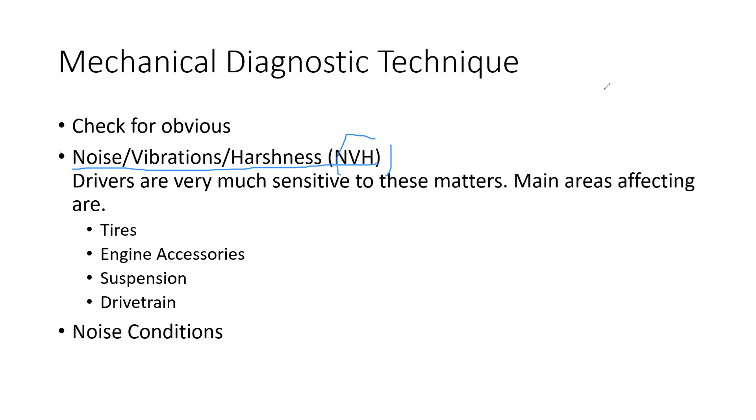So the difference you feel between a brand new vehicle and an old vehicle actually comes down to this NVH part. There's a specific module dedicated to this in your syllabus, which I think you'll learn in the seventh semester. Since this is the most important part we can feel - we can't feel anything happening inside unless it's transferred to the driver as noise, vibration, or harshness. Harshness being a very rigid suspension, or knocking, that sort of thing is what we actually feel.

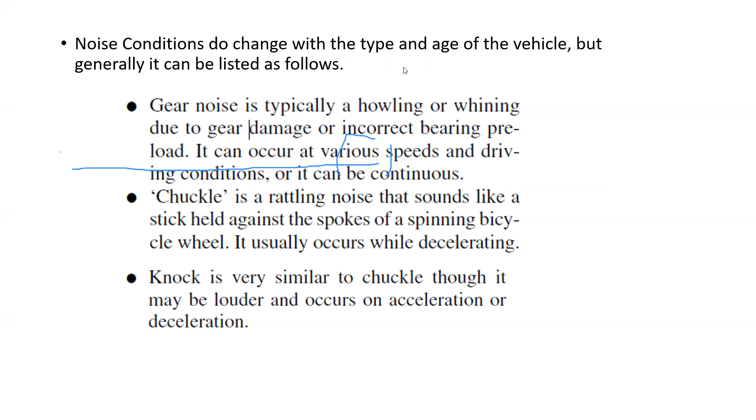So when it comes to noises - in this mechanical diagnostic section, we will be discussing these three: noise, vibration, and harshness. Noise is one of the main things. Noise conditions do change with the type and age of the vehicle, but generally it can be listed as below. That's an important thing, let me explain why.

If you look at a vehicle made in the 1980s versus a vehicle made in the 2000s - let's say a car, let's take a Toyota Corolla, a very common example. If you take a Toyota Corolla made in 2005 and compare it to the same vehicle made in 1985...

That's a 20 years gap. So between these 20 years, the vehicle's engine noise changes, right? Body shape changes. So because of these changes, the noise will actually be changed.

One of the main important things is, if you look at an old vehicle, something like the 1985 Toyota Corolla, it has rubber seals going all around the wheels, all around the windows. That rubber strip goes around the windows. But if you look at a new vehicle, you can't actually see it.

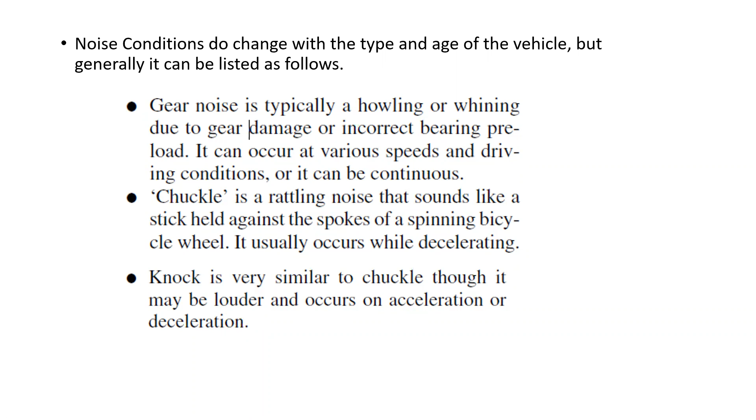These very common noises are still present, because even though the vehicle body and shape change, the basic principle of how the vehicle works will not change. So they will still be there.

Next thing is actually the vibration condition. Clicking, popping, or grinding is noticeable at low speeds, but caused by...

inner or outer CV joints, often due to lack of lubrication. So check for split gaiters. The vibrations could occur due to any of these reasons. As mentioned, CV joints, loose drive shaft, and other components contacting the drive shaft, for example the exhaust pipe contacting, and also handbrake cables. Or loose bearing in the drive shaft, the carrier bearing, or a damaged or incorrectly installed wheel bearing.

Wheel bearing installation is a very tricky job. You need to add the correct preload in order to keep the wheel running without it coming loose. If it is installed incorrectly, it could create a vibration, or could even damage the wheel bearings. Makes a lot of sense in this case.

Brakes or suspension components. Brakes actually have big issues. The brakes start to wear out, especially the disc brakes, during heat. Because of the heat, they start to warp. Warp means they start to create like a waveform, similar to a wave, in the disc.

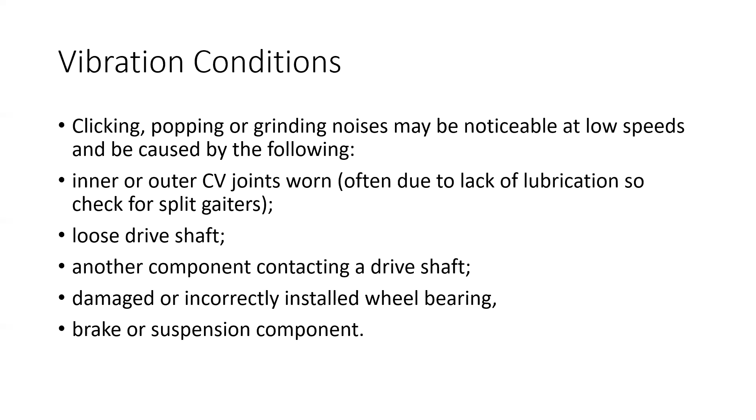With this, when you are applying the brakes, it actually starts to create a vibration. Suspension components could also create vibration, especially if they are worn out and old, or if the vehicle is kept for a long time without running, the suspension could get a little bit jumpy, creating a vibration.

Some of the common reasons for vibration are out of balance wheels. This is very common, because especially in Sri Lanka, most people do not follow the correct procedures whenever they replace new tires, you should always balance the wheels. That's actually very good for the health of your wheel bearings and steering. So normal speed vibrations mostly come from out of balance wheels, out of round tires.

Now, out of round tires are mostly caused by braking, or by keeping a vehicle parked for a long time. That actually creates a flat spot, if you apply hard brake without ABS.

If you apply hard braking without ABS, since the vehicle wheels will lock up. Since the wheels tend to lock up, that locked up wheel will start to slip. So that rubbing against the wheel will actually remove a certain amount of rubber from the tire, causing out-of-round tires and vibration during acceleration.

So that can damage powertrain and drivetrain mounts. That's a very common thing, and also excessively worn or damaged outboard or inboard CV joints.

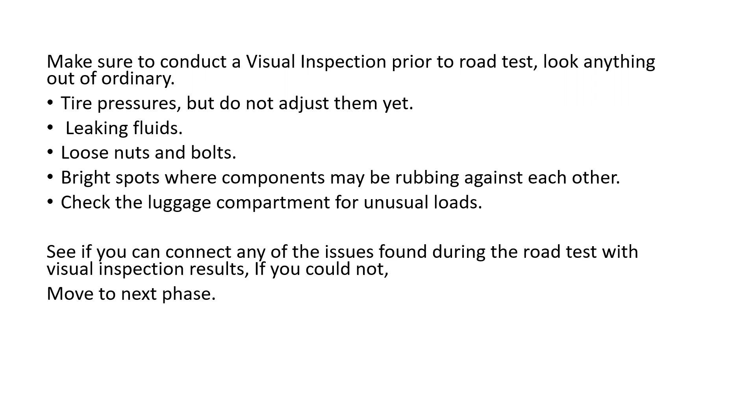Before you do any road test, you should also check whether the luggage is properly kept. If the luggage is flying around, you may accidentally think a sound is coming from somewhere else, even though it's actually coming from the luggage of the vehicle. See if you can connect any of these issues found during the road test with the visual inspection results. If not, you could move to the next phase - dismantling the components.

So in the road test, there are a few things you can actually keep in mind whenever you are doing a road test.

You can test normal driving speed of 20 to 80 kilometers, that's 15 to 50 mph. With light acceleration, a moaning noise may be heard and possibly vibration is felt in the floor pan. It may get worse at a certain engine speed or load. So it's not actually from the engine, it's actually coming from the floor pan.

During acceleration and deceleration, shake is sometimes noticed through the steering wheel and seats, front floor pan, and door trim panels. High speed vibration may be felt in the front floor pan or seats with no visible shake, but with an accompanying sound or rumble, buzz, hum, drone, or booming noise.

This can occur with the clutch pedal down or gear lever in neutral and engine idling. If the vibration is still evident, it may be related to the wheel, tires, front brakes, disc, wheel hubs, or wheel bearings. This is one of the simple methods used to identify whether the noise or vibration is coming from the engine or from the drivetrain.

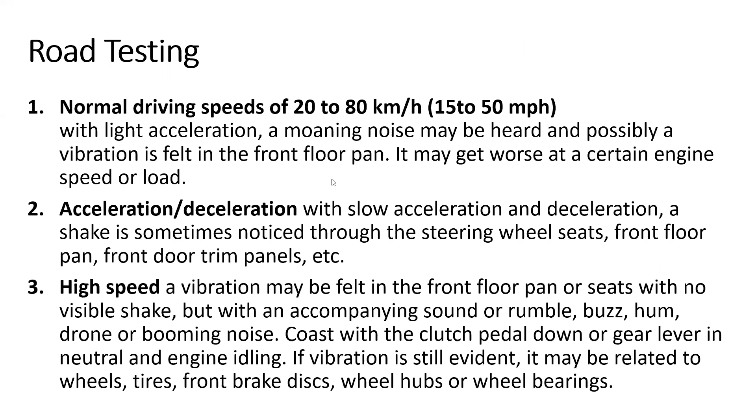So again, I'm just trying to explain some things you can identify in the road test. During the road test, your main purpose is to make sure that while keeping your eye on the road, you should be able to identify where the sound or noise is actually coming from.

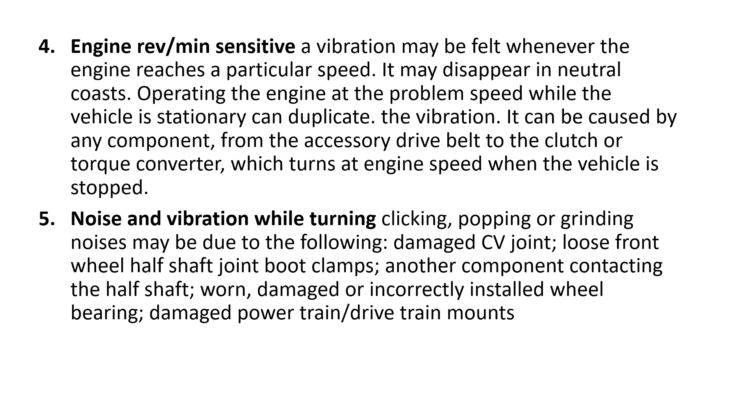Noise or vibration - by conducting a simple test, something like pressing the clutch pedal or applying the brakes, you should be able to isolate where the problem is coming from. In this case, you can use the usual 6-step method to identify the problem.

So for some reason, if you are not able to confirm your problem, sometimes you may be able to find the problem, but you are not sure which component is actually generating this problem.

In this case, you can bring the vehicle to a lift, a two-post lift, and drive the vehicle while it is on the lift, to find out what the problem is. So this is not actually something recommended. You can do it, you should do it, but it's not the best thing to do.

The best thing to do - since the vehicle is off the ground and the wheels are at their highest suspension position, it's not the best way to find out problems if it is something to do with suspension.

That being said, some precautions could be used. One of them is you should not drive the vehicle over 55 kilometers per hour. If you try to accelerate over that, it could create too much vibration that your lift could not withstand. And steering joints should not be operated at high speeds at high angle, as it could be damaged, since the vehicle is at its highest suspension position, so your vehicle wheels are suspending from the air.